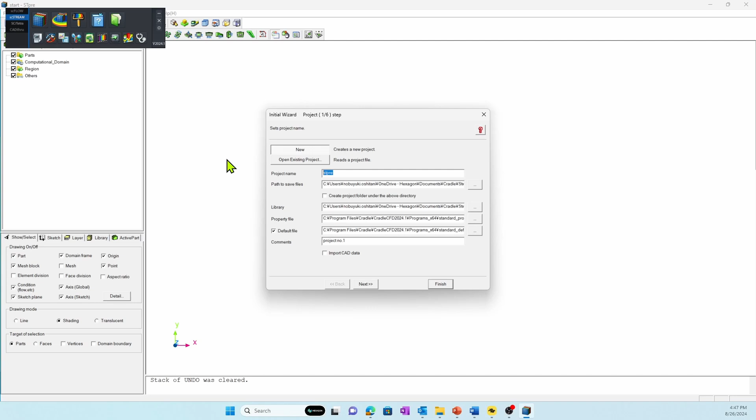First, let's open the preprocessor and import CAD data. When preprocessor is launched, the initial wizard will appear. Let's set the project name and working folder.

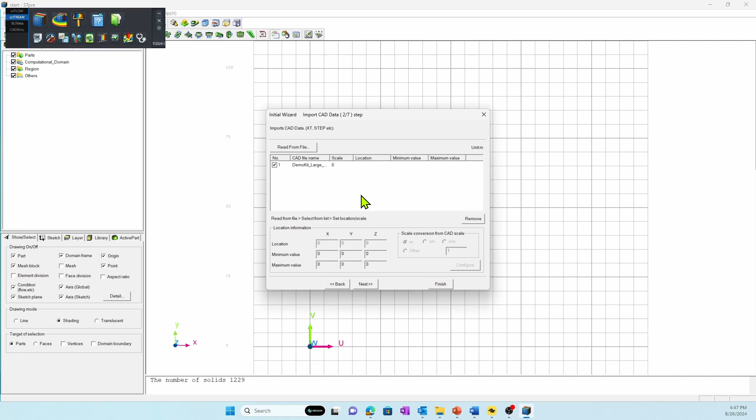Then enable import CAD data and specify the CAD data to import. The CAD data I am going to import is saved as a parasolid file format, but scSTREAM supports most CAD data formats. Click Finish to import CAD data and close the Initial Wizard.

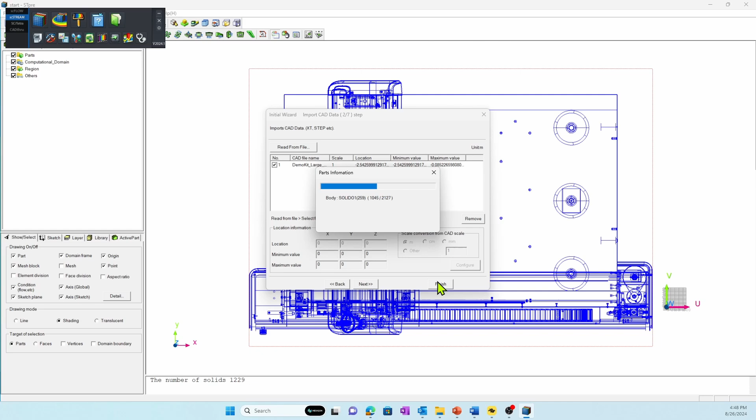CAD data import is completed. You can see that the number of parts in this CAD data is over 1200.

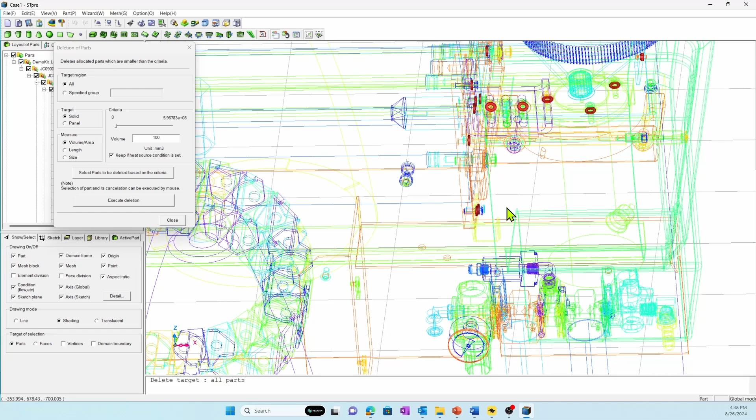Go to Edit Part Deletion to open the Part Deletion dialog. For this kind of complex geometry, there are so many parts. We can delete small parts by specifying part size or volume. For this demonstration, I do not delete any parts and simulate as it is imported, but I would like to let you know that there is a capability to do so.

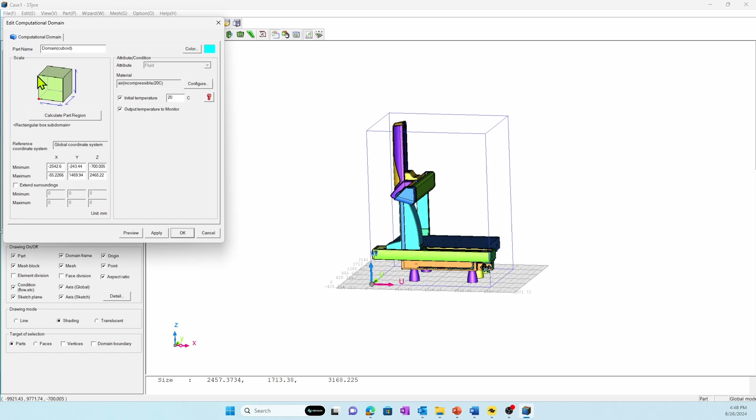Next step is to set the computational domain. Double-click domain cuboid from the left tree, then click Calculate Part Region to fit the domain to the coordinate of the geometry.

To solve airflow around the machinery, enable Extend Surroundings and input values. Click Preview and confirm the computational domain.

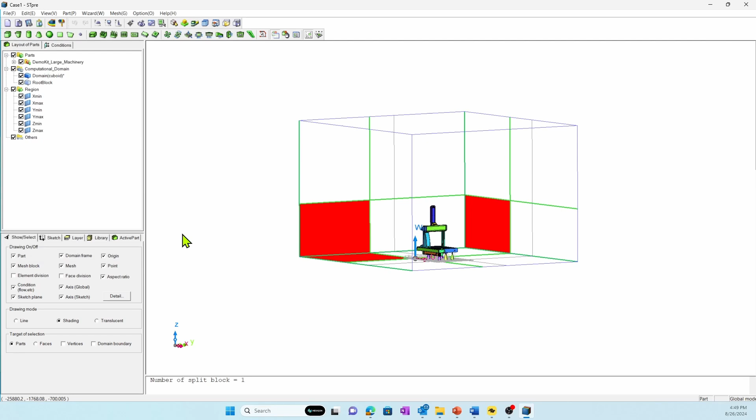Next step is to set material property to all parts. In this demonstration, I assume that most of the parts are made from stainless steel, so I will set all the parts as stainless steel by selecting all the parts using rubber box selection.

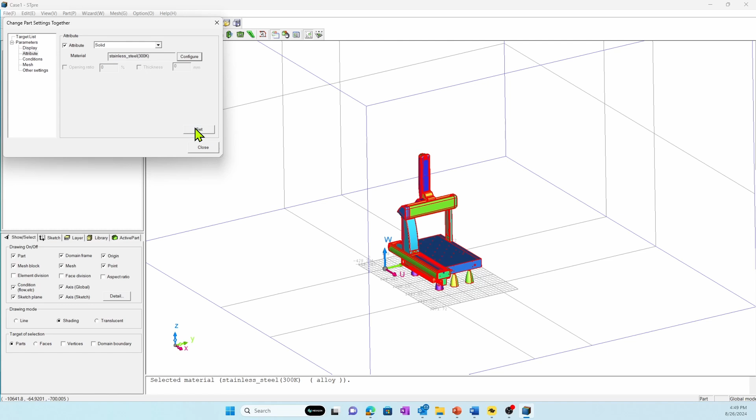It is useful to use the Change Part Setting Together menu to set part conditions at once. I am going to modify attribute and select stainless steel, then change the material property to polycarbonate resin for some of the selected parts.

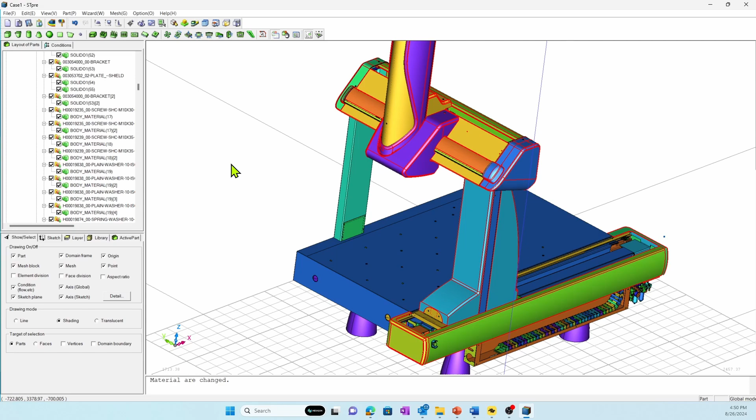Next step is to set heat source to 3 motors. Let's locate the motors by hiding enclosures. You can find 3 motors in the geometry.

If you double-click the part, you can set heat source individually. Let's set the heat source for all the motors.

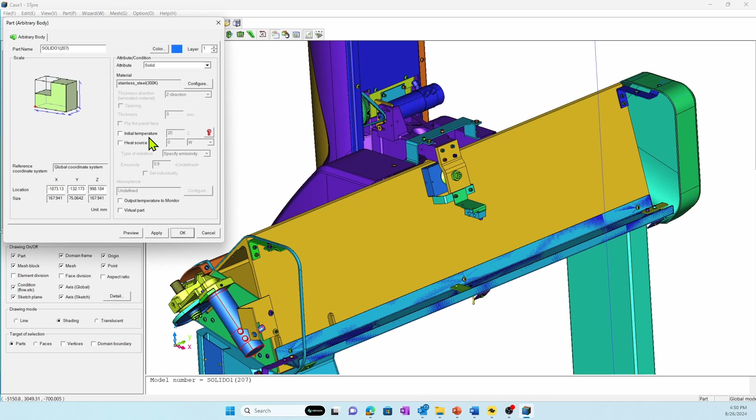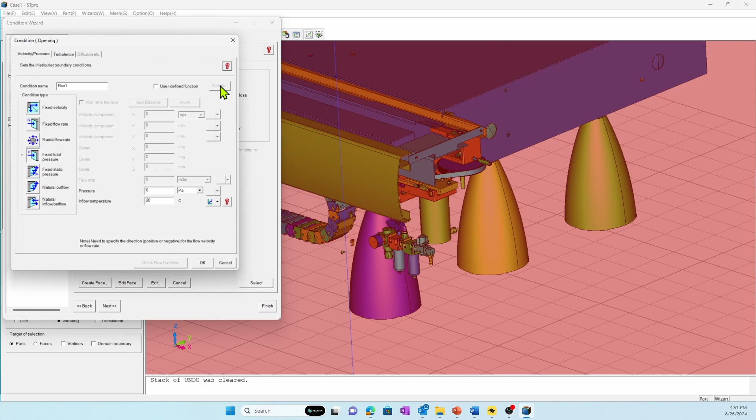Next step is to set boundary conditions. Open Condition Wizard and move to Flow Boundary. For all sides of the domain, set Fixed Total Pressure condition. For the top surface of the domain, set Natural Outflow condition. The bottom face is assumed to be floor, and no slip wall will be set by default.

We are ready to create a mesh now. Open the Mesh dialog and input the standard length and threshold length, then click Gridding to confirm the size of the mesh. Then click Meshing to discretize to elements.

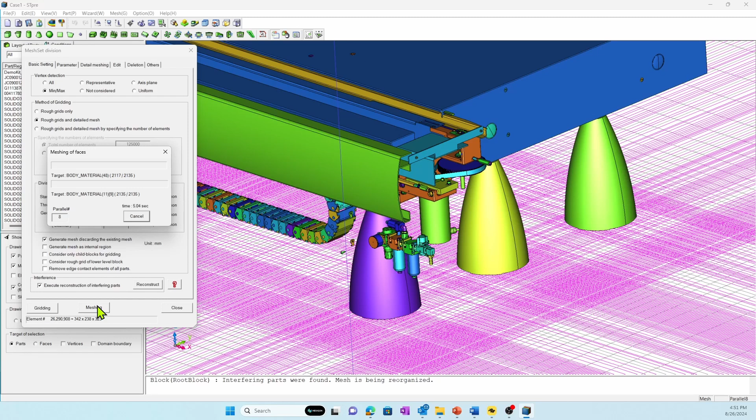Meshing finished in just over 8 seconds, and the number of elements is over 26 million, which is written at the bottom of this dialog.

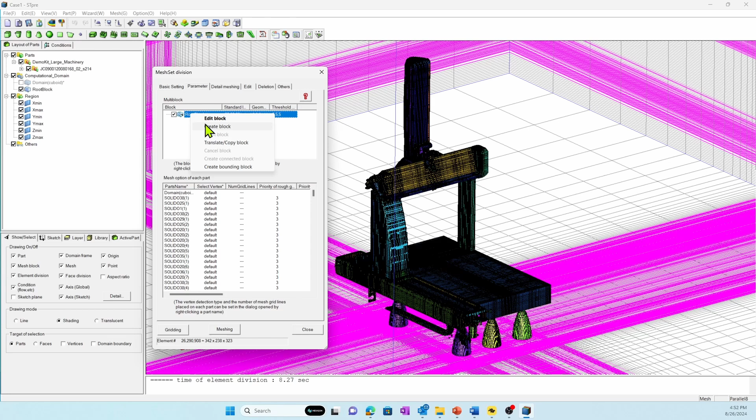In scSTREAM, there is a technique to locally define the mesh by creating mesh blocks inside of the domain. Right-click on the root block and select Create Block. Define the size of the block by referring to parts. Extend the domain to have some transition region away from the referred parts, and input the mesh parameters. Create 3 more blocks inside of the second block to have a finer mesh around the motors.

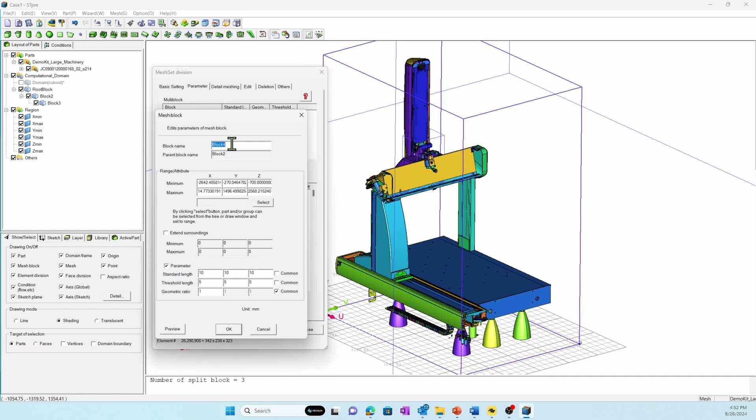Then click Gridding and Meshing. This time, the number of elements is about 34 million, and meshing took about 8 seconds.

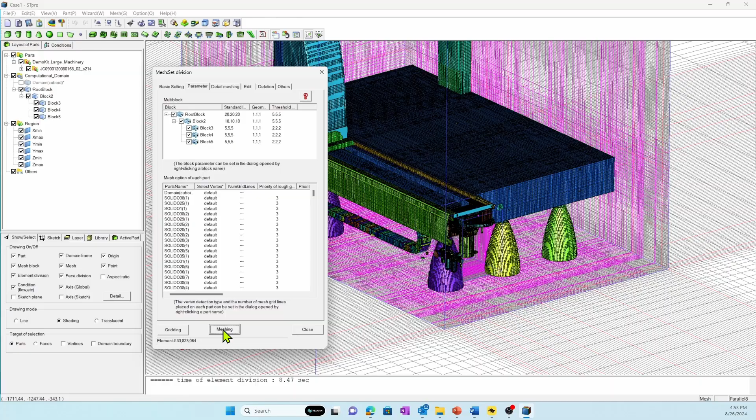After the meshing is completed, let's check the mesh. From Mesh, showing mesh cross-section, you can visualize the mesh cross-section. You can select axis and move the slider to adjust the location of the cross-section.

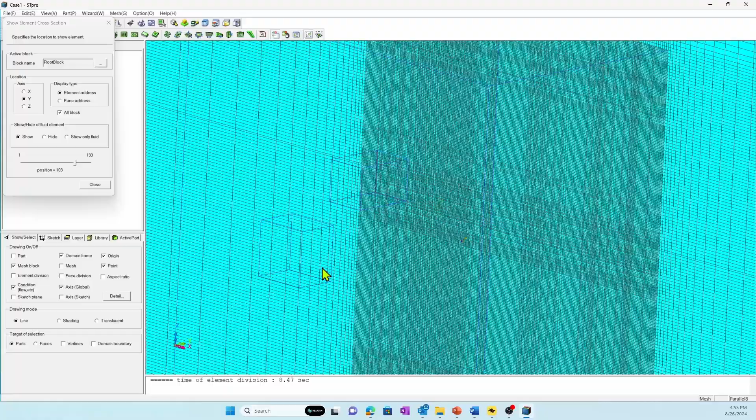Also, in the parts table, you can see the volume of the original part, volume of the meshed parts, and the ratio.

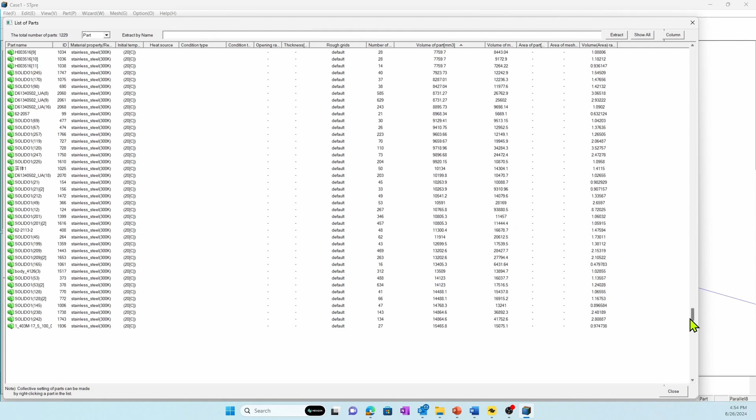Now, all the setup in preprocessor is completed. So let's move to solver by clicking the solver icon.

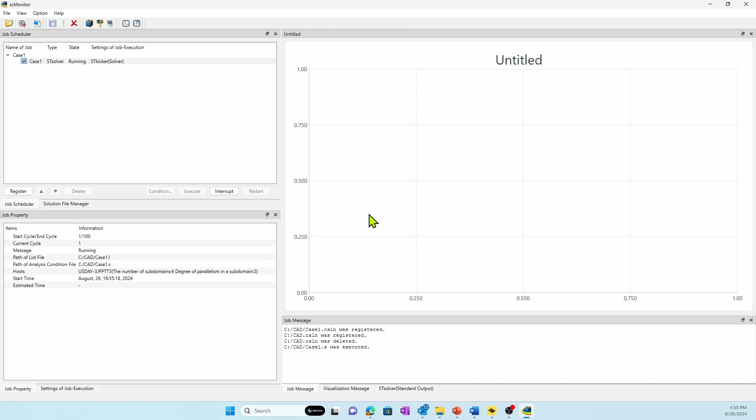Solver monitor was launched, and the simulation input file was loaded automatically. Click Execute to run the simulation. For your reference, the simulation takes 40 minutes using 8 parallels.

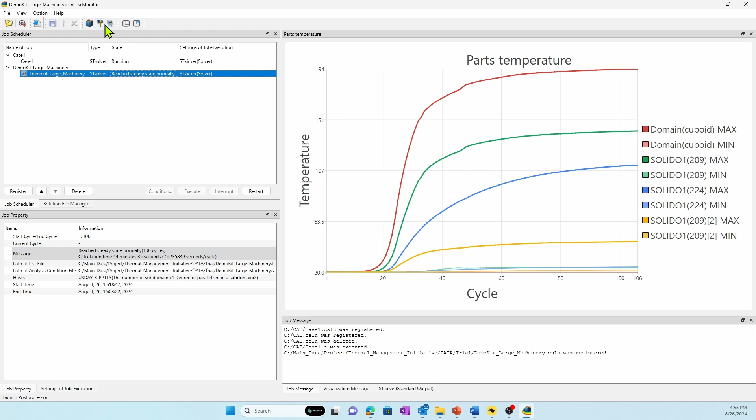Simulation completed. Now let's visualize the result in post-processor. Click the Post icon to open the post-processor, and the result file will be loaded automatically. Since the simulation is relatively large, it will take some time to load the data.

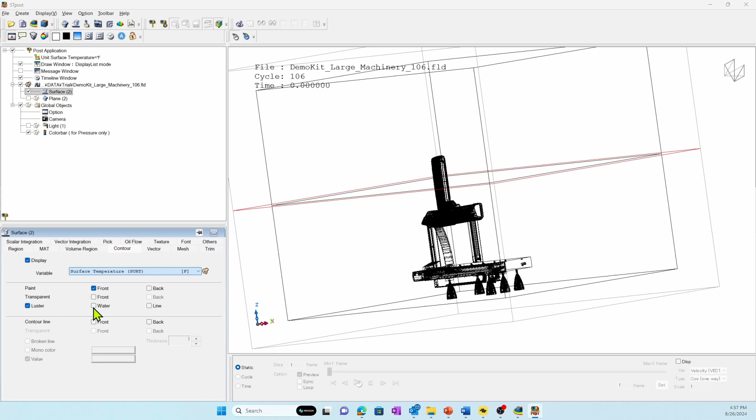Loading data is completed, and now you can visualize the result. For example, you can see the temperature by showing temperature on surface. You can adjust the range of the temperature color bar.

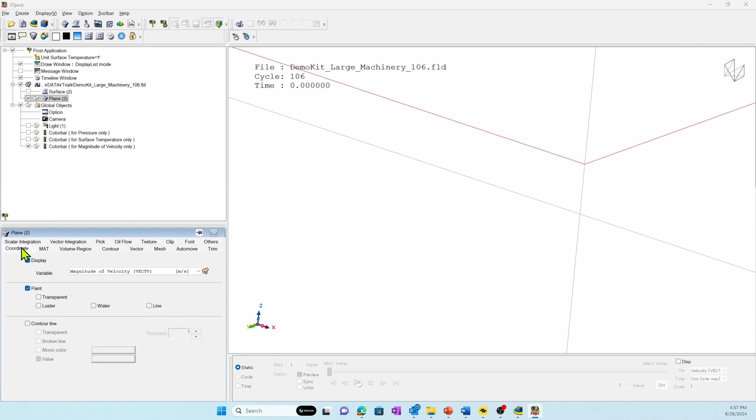Also, you can show the cross-section velocity in plane. You can adjust the parameters to show vectors to easily see the flow field.

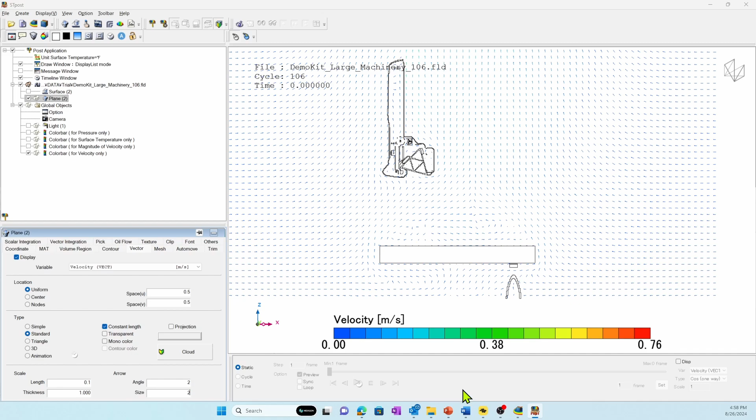There are many options to visualize results in post-processor. Let me show you some examples here.

With this, I will conclude my demonstration. Thank you for your attention.